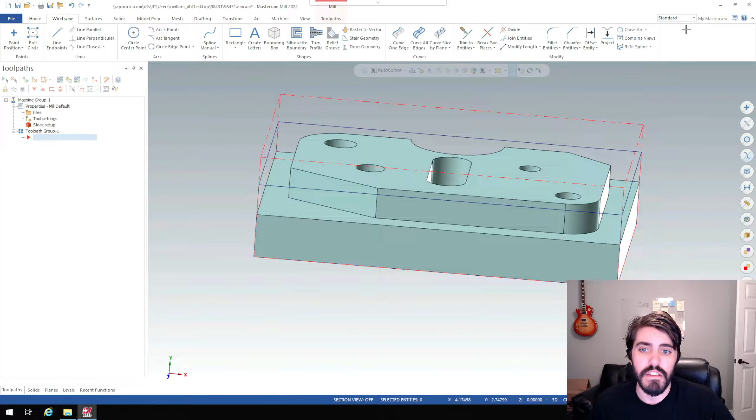In this video, we're going to continue on with MasterCam and I'm going to explore two different 2D milling operations. And these are going to be more simplistic in that we're going to use face milling to cut away the extra stock material. And then we're going to look at some contour milling, which is just going to be the outside island of the 98431 part that we have in front of us.

So I'm going to now move back into my Toolpath tab. And inside Toolpaths, you'll notice that we have a 2D file folder collection as well as a 3D multi-axis. And if you hit the drop-down arrow in all of these, you'll see that there's more icons that are all logged in each one of these. Typically, you're just going to find whatever operation that you're doing, so like a 2D operation.

And when I hit that drop-down menu, I'm going to look for face milling, for instance. So I'm going to click on face, and Toolpath Group 1 is creating a facing operation in that first icon underneath Toolpath Group 1. And whenever you're selecting Toolpath, it's asking you to either use wireframe geometry or 3D geometry, and it's giving us a couple options in how we can select it.

So the first piece of geometry that I want to use for face milling is that wireframe bounding box that we created. So instead of relying on the solid geometry, which is the blue box that's filled in, I'm going to use this wireframe mode over here in the solid chaining. And then it's going to change to wireframe chaining. And I will then select just a solid chain here.

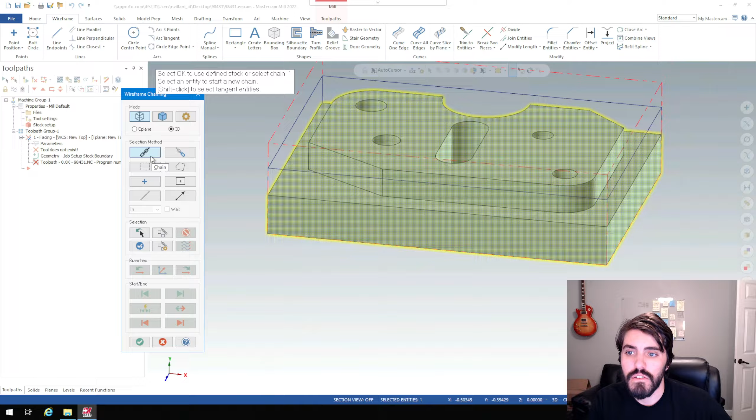And when I click on one of these top blue lines of my wireframe, you'll notice that I have more arrows that I can either choose or select from. If you want to, you can select this red arrow all the way around. I think even easier is just to hit the fast forward button right here, so it's endpoint forward inside of this chaining toolbar here. So I'll click this 3 times, and that's going to go all the way around the top of our face there at the Z0. I'll hit the green check mark, and then it's going to open up this 2D toolpath facing.

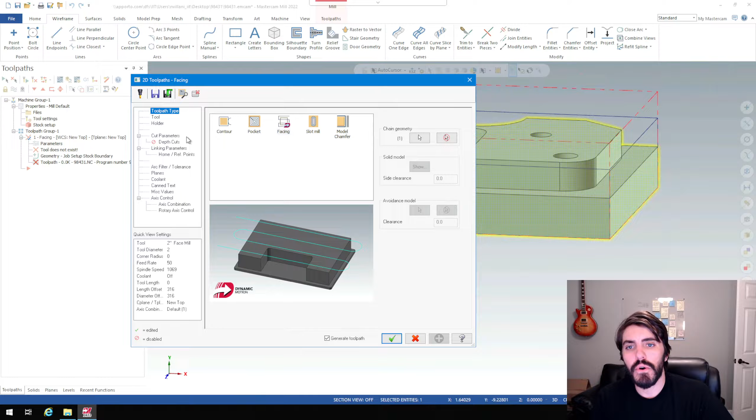So this is the bread and butter of all of the toolpath operations and how you set up your settings inside of MasterCam. So we've already selected what kind of toolpath type we're doing, so it's facing, and the chain geometry is right there. That's what we just clicked. If I have to make any changes, if I forgot to select a piece of geometry, I can always click on this again. I can right click and I can rechain all, and I can click through it once again if I wanted to. So you have total flexibility to go back in and manipulate those selections.

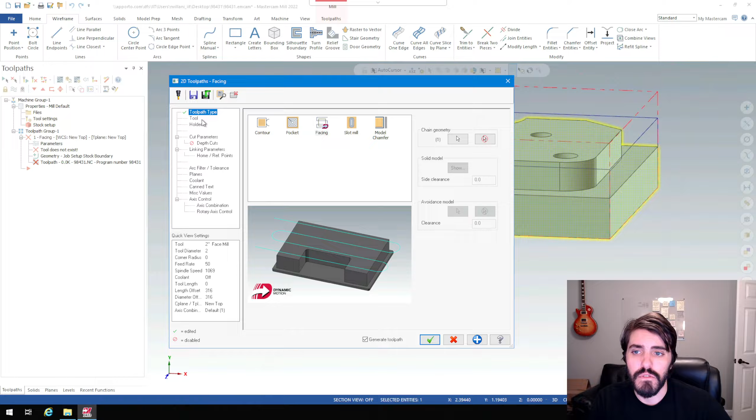We're going to go into Tool now, and inside of Tool, this might be a little bit overwhelming when you're using a stock machine. So if we go in here to Select Tool Library, you'll notice that there are quite a bit of tools that we can choose from. In this specific instance, I have 446 tools that are in this specific library. We're obviously not going to use all of those when we're going through this 98431 part.

And I'm going to try to whittle this down and filter it out by then going into Filter. And you can see here we have an array of different icons that we can select from. I always just hit none so that it doesn't select any. And then if I'm using a face mill, for example, I know what the face mill looks like. And you can also hover your mouse over all these icons and it'll tell you what they are. So this would be an end mill flat, end mill sphere, which is a ball mill, end mill bull mill, and so on and so forth.

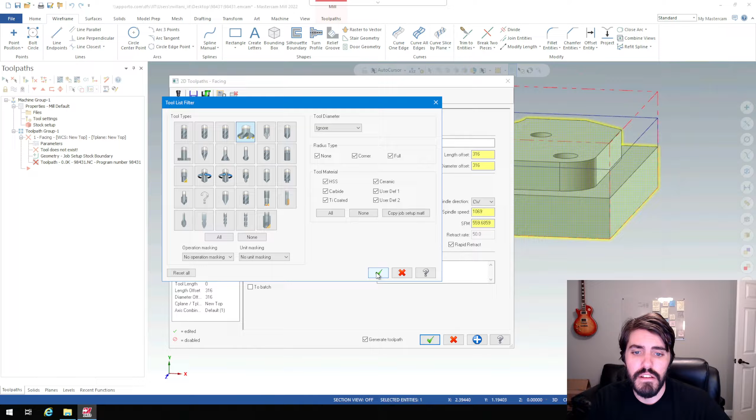So I'm going to click on the face mill, which is the 4th icon, and then I'll hit the green check mark. So now when I go back into Select Tool Library, it actually filters it down to just a handful of tools instead of the whole 446 options that we had before. I know that I have a 3-inch face mill in our machine, so I'll click on 3-inch face mill, hit the green check mark. We have some standard speeds and feeds that are set up with whatever tool that we're pulling from that library.

I'm not going to go into changing these quite yet, so I'm just going to add a comment now and just say 3-inch face mill, which is helpful because when we export this out as G-code and we see the whole post, then I can look for specific instances of where those notes are, and I know where that operation starts and ends. So always put a comment in with whatever tool that you're using.

Holder, we're going to leave that stock. Cut parameters. This is just how the tool is going to cut in what direction. So for example, we can have it just cut one way and come across and then come back and cut again. I'm going to do something that's simple, but it's also bad for the tool in this instance. This is just more or less for educational purposes and how to understand it, but we're just going to do one pass. So we're going to use the entire tool and we're going to try to cut away the entire face.

So I know that the part, its width there is 2.5 inches and I have a 3-inch face mill. Well, I can cut across that entire face using the entire face mill. It's going to be bad because it's going to create heavy chip load on that face. We'd rather have it come in with a radius so that we have thick to thin chips. But in this instance, when we're coming across, it's going to be thick, thick, thick, pretty much until the halfway point. So we're going to do one pass. I'm not going to change any of these other pieces of information.

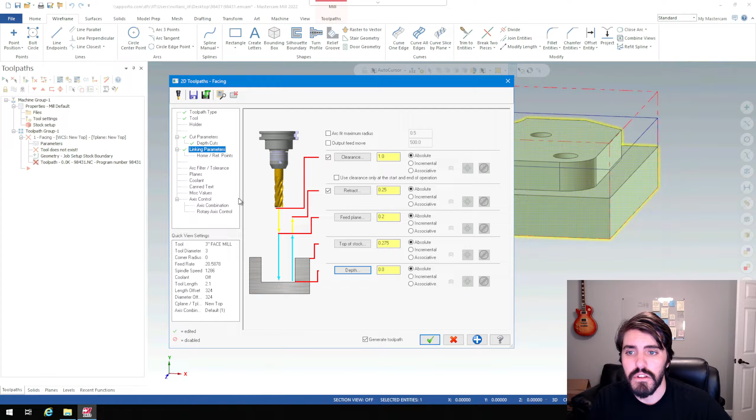We can also override this a little easier by just clicking on these depth or top of stock icons. And I can select, for example, this is my Z0. Any position on the Z0 I can select and it'll pick up 0 for that dimension. You can go down here into planes and make sure that this says new top, new top, new top, linking itself back to that new top plane that we created. And then inside coolant, I can just turn my flood on. Once you've set up these settings, it's usually going to remember them for the next toolpath, so you won't always have to go back into here.

So I'll hit the green check mark on this first face mill. I'll zoom out a little bit, and I'll explain how to see a simulated version of this toolpath. So right now I can see my blue lines are coming across and they're going down in those 60 thousandths increments.

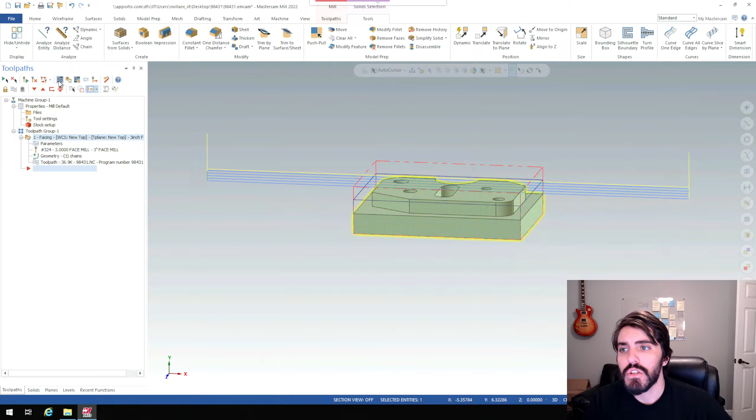And I can see how that tool moves by selecting the waves over here in the toolpath group. So if you look for the waves, you're going to hover over it and it says backplot selected operations. So when I click on backplot, you will then simulate a tool for whatever operation is selected. So you can see over here in my toolpath group, I have a blue check mark that is over the file folder of the facing operation that I just created. So that's telling me that it's going to simulate the backplot of that specific operation.

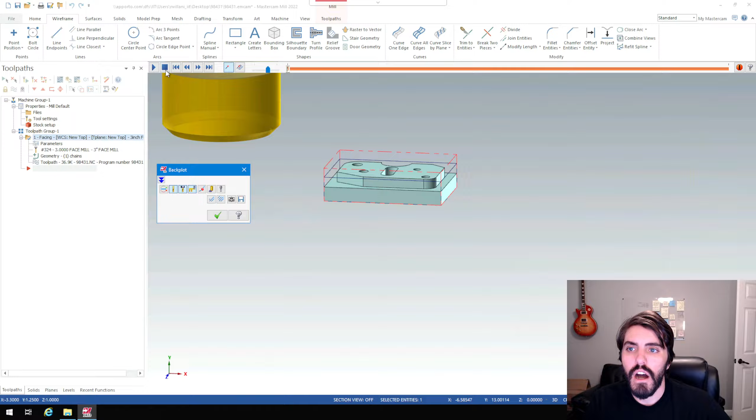And then you just hit the play button and you'll see that it's going to then travel with that blue geometry. And that yellow geometry is actually good to see too, because that's the rapid that's moving back to its original location. So we're seeing something interesting with this toolpath we just created. I'm identifying a couple things right here. First, that there's a lot of wasted time going up to that rapid clearance and then coming back over. And then also that it's going a little bit too far off the part. So we can actually manipulate that toolpath geometry after it's already been created.

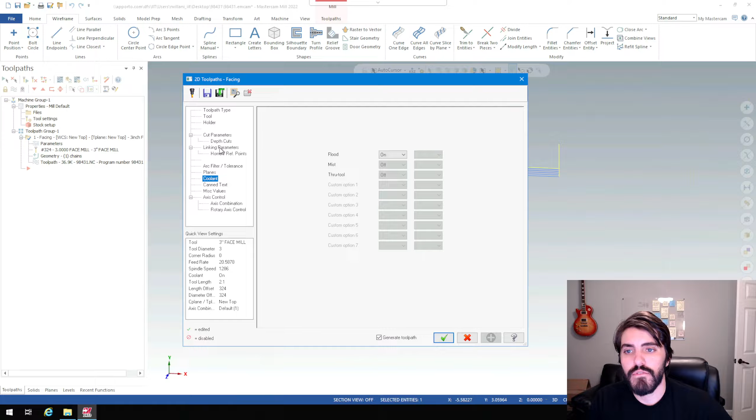So I'll hit the green check mark here in the backplot. And I'll then go over here to my toolpath tab on the left-hand side. And then I'll double click on parameters under facing, that first operation. It's going to bring me back into the parameters window here. And I'm going to click on cut parameters. And I'm going to change this. So this is the overlap.

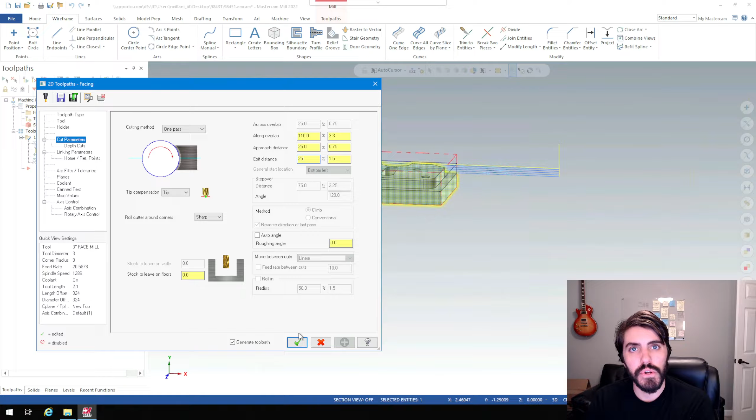So now I'm going to change my exit and approach distance. So instead of it being 50% off the face, I'm going to make it 25% and 25%. And what this is doing is it's going to reduce the distance it's traveling off that face from left and right, the approach and exit distance. So if I hit the green check mark here, you're going to notice that this blue line is going to shrink by half.

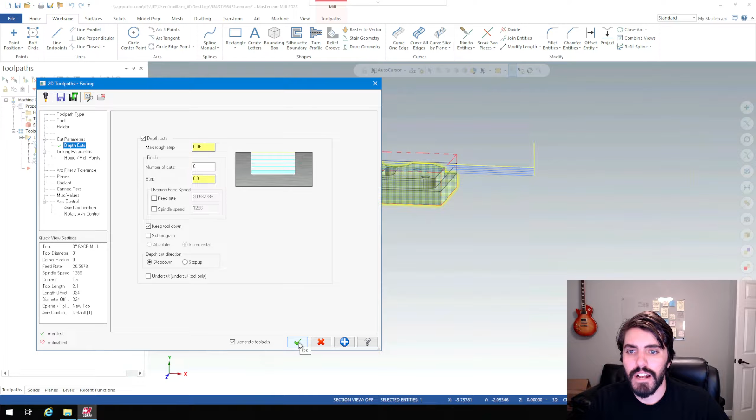And then we'll double click on parameters once again, and then we'll go over here to depth cuts. And inside depth cuts, we're going to choose to keep the tool down. So when we click on keep tool down, which is located right here, it's going to remove that rapid every time that it's going from one side to the other. So I'll hit the green check mark. And now when we go back into our backplot, which is the little blue waves right there, let's take a look at how this looks now.

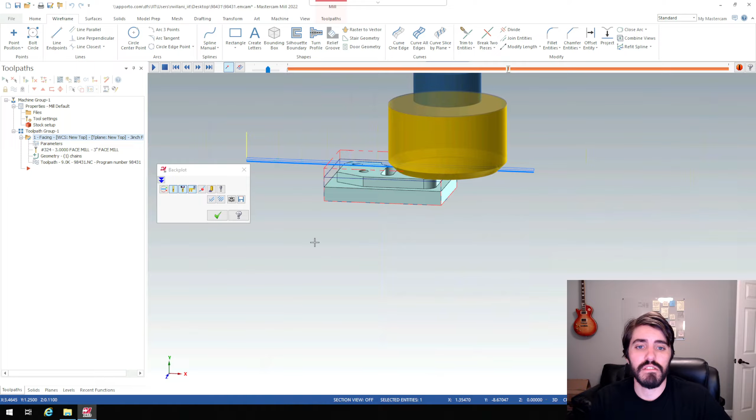So before it was coming across a little bit too far and then coming up. Now it's just going back down and it's doing one pass back and forth. And again, it's kind of bad for the tool, but it's easier for us to understand this type of geometry as we're starting to enter in the face milling. All right, then I'll hit the green check mark, and now I can continue safely on into my contour steps.

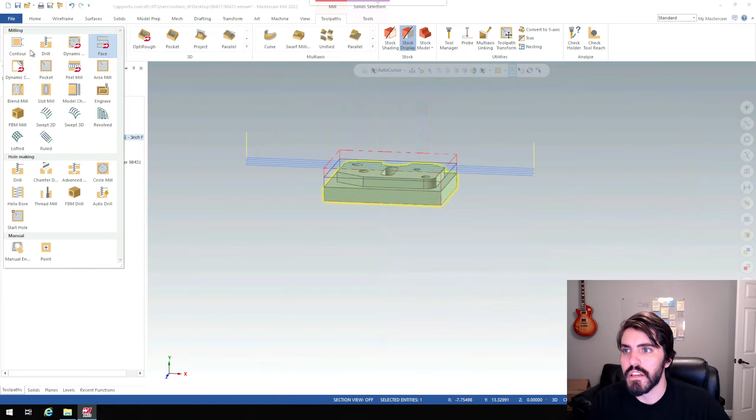So I'm going to go back in here to toolpaths up here in this tab. Looks like I accidentally clicked off of it. And then I can click contour right here. I can hit the drop down again and choose contour once again. And you'll notice that we have a contour that was selected in our toolpath group. Now this is our second operation.

And one thing I want to point out here, when we're talking out on the shop floor, usually when we talk about operations, we talk about operations as how many times it has to move inside of the work holding and how many programs are associated to that. Inside of Mastercam, it's a little bit different in the sense that every toolpath that we're creating is also called an operation. So you might see toolpath group 1, which is operation 1, and then toolpath group 2, which is operation 2, and then inside each one of those operations are 5 or 6 or 7 different operations. So just keep that in mind as we go through some of these different kinds of toolpaths.

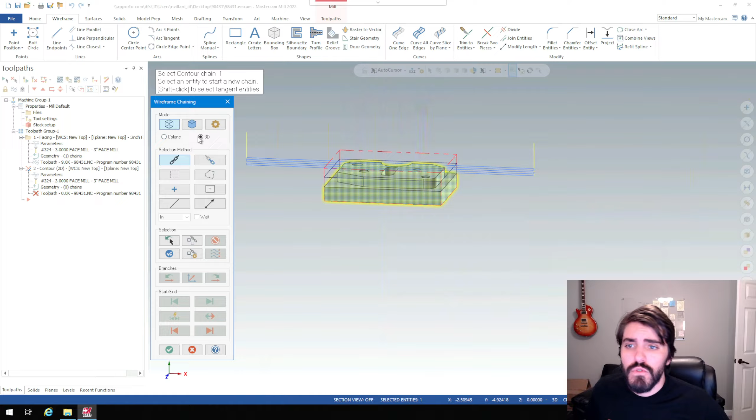So now I will be choosing geometry for our contour milling. And inside contour milling, I don't have any wireframe to reference anymore. So I'm going to go over here to the solids icon, and I'm going to move this window out. This window just tells you easy ways to select geometry here. Usually it's giving you a direction of what you have to do next to move on to that next step.

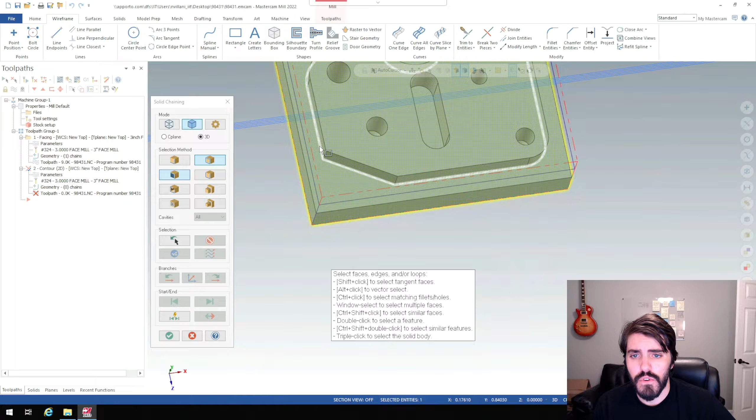But inside of the solids here, I'm going to make sure that I have a solid loop here as well as faces selected. I can also deselect face, but these are the two that I usually keep on the most. So now when I have loop selected, you can hover over your geometry that is connected via tangency. So for example, I want to select the contour right here, and I'm going to go around the entire part.

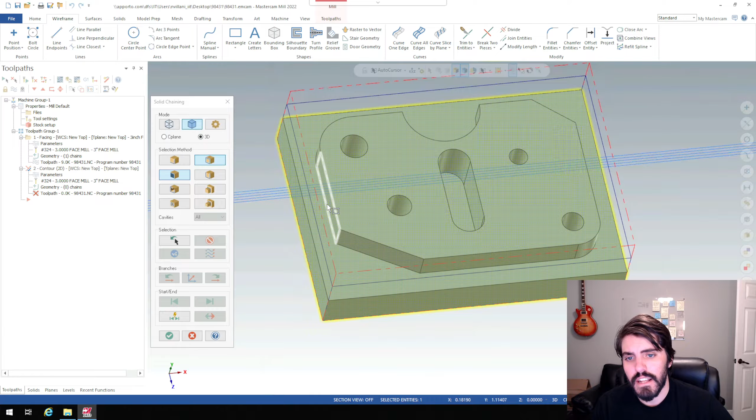Move this down here a little bit, move this window out, and I want to select the geometry that looks like this. And it's hard to kind of get this the first couple times. You might accidentally click this square here, this rectangle here, but you want to get to a point where you can select this point of tangency so it's getting the entire island.

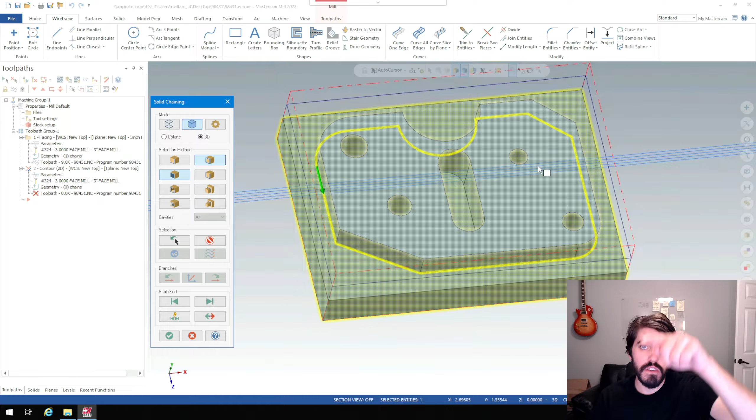And it's important as well where you are selecting on that line of tangency, because for example, if I select up here, my arrow is going to go down, and that's going to create a conventional milling operation, which is not necessarily what we want to do for this island here. I want it to be climb milling. So I don't want it to be going counterclockwise. I want it to be going clockwise.

So I'm going to unselect here, and then I'll select it again from this quadrant. And you'll notice that that arrow is now pointing clockwise, which is what I want. It's my climb milling operation. I'm going to hit the green check mark on OK. And then I'm going to go back into tool because I don't need to change my toolpath type.

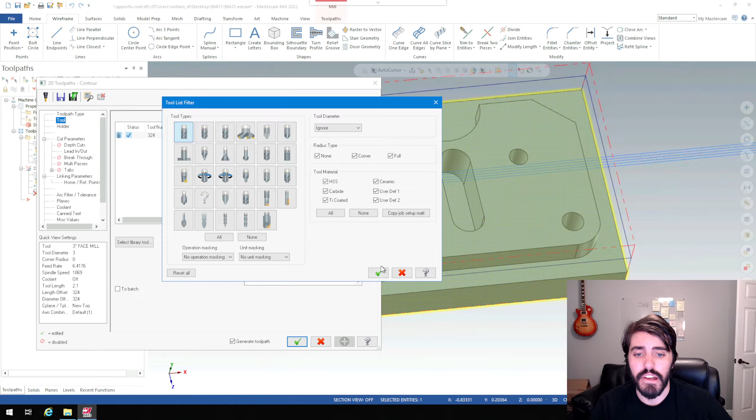And once again, I'll have to look for a specific tool. So I'm going to use a 5/8 end mill in this instance. And once again, I'll go into filter and then I'll select none. And I'm looking for a flat end mill, which is our first selection. And then select tool library. And I'm going to look for a 5/8 flat end mill. So right there, tool 292. Hit the green check mark. And I'm just going to title this 5/8 rough contour.

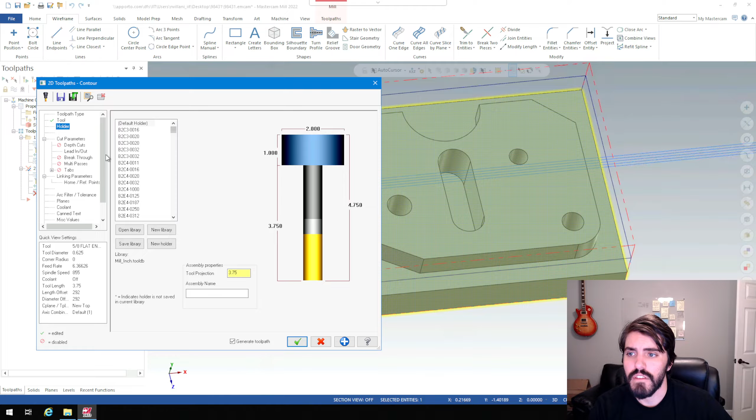And then I'll go down in here to holder. We're going to leave that default. Cut parameters. We're going to leave the compensation type as the computer because that's how we selected it. We're already going clockwise in this instance. And cutter compensation, we're going to leave left. Tip compensation, that's fine.

And then we're just going to leave some stock on the wall. So in this instance, I'm going to leave about 5 thousandths on stock wall and then 5 thousandths on stock floor. We'll go to depth cuts. We're going to go the full length of the tool here. That's totally fine. And then we're going to go lead in, lead out. This is important. This is like what I was talking about with the thick to thin chips.

We don't want to just crash our tool into the side of the part and then move up in terms of the geometry. So think of this kind of like a Formula One race car. If you're going like 200 miles an hour and you want to take a turn, well, you have to slow up and then ease into that turn as you're curving into it. You don't want to just go straight in and plunge to the left.

So these tangency loops are going to help us with our lead in, lead out. It's just creating a nice arc to kind of ease the tool into the side of the part as it's cutting. So I'm going to leave this all stock here. If I wanted to change it, if my work holding was a little thinner, I could adjust that. Go over here to linking parameters.

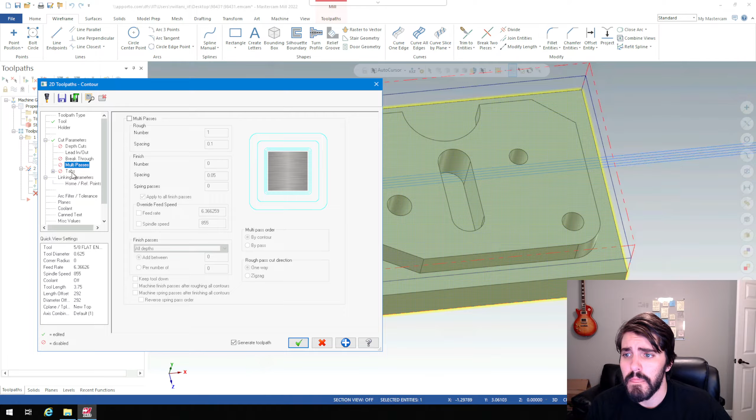We can turn on our clearance. We can change that to 1. Retract, we'll do absolute, absolute, absolute, absolute. So again, this is a pretty interesting instance where I have my top of stock. It's recognizing that the top of stock is still set from the stock setup that we had. Well, that's cut away now with that facing operation. So we're going to choose the top of stock to be 0.

We can type it in, obviously, but we can also click on top of stock, and I can select anywhere on that wireframe there. So that top of stock will be 0. And then I'll hit the green check mark. So you can see I have toolpath that is now going around the contour of that island. This is just a roughing operation where I'm just kind of cleaning up the outside there.

And I want to use this as an example because the way that I've explained G-code in other lectures is that we want to create an offset or a cleanup before we get to this finished face. And you'll notice something that's interesting between two different ways we can view this toolpath. So for example, the first way that we can view it is that back plot, which as I

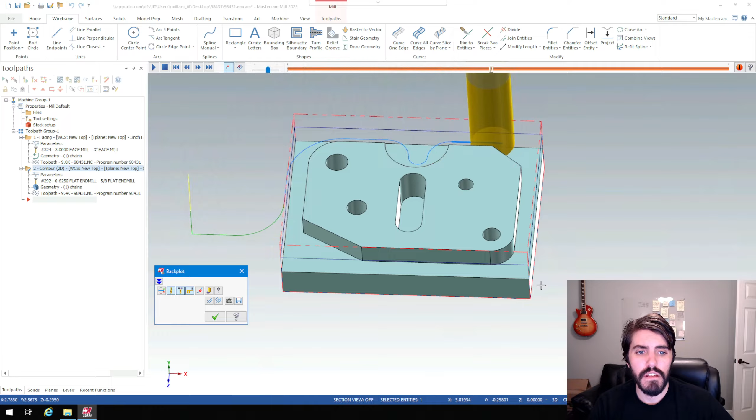showed you right here. And if I see this tool and I hit the play button, nothing looks terribly out of the ordinary here. It's going to just travel around the face of the island or the tangency loop of the island, and it's going to exit out on the left here. And this all looks good, but right here is where we're going to see a problem with the next simulation that we're going to do with our toolpath, and I want you to keep that in mind.

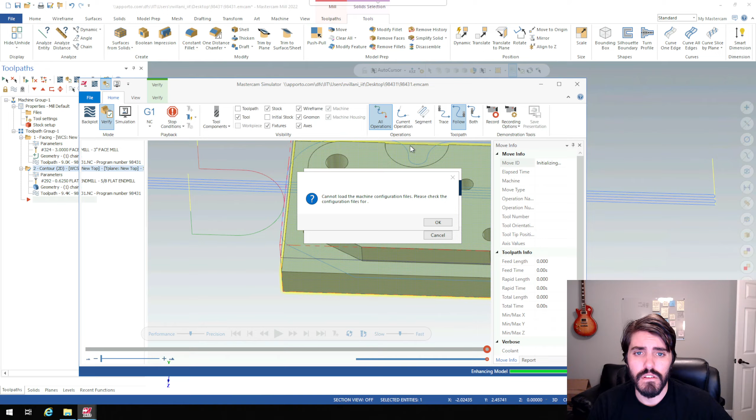So instead of using the backplot now, I'm going to now select verify, which is the little half pipe that's next to the backplot option. So I'll click on verify. Sometimes you have to click through this a couple times. It's going to default to a machine. Sometimes it's not finding the post for it. So click X. You can also hit OK, OK, X on that, and then go ahead and click it once again.

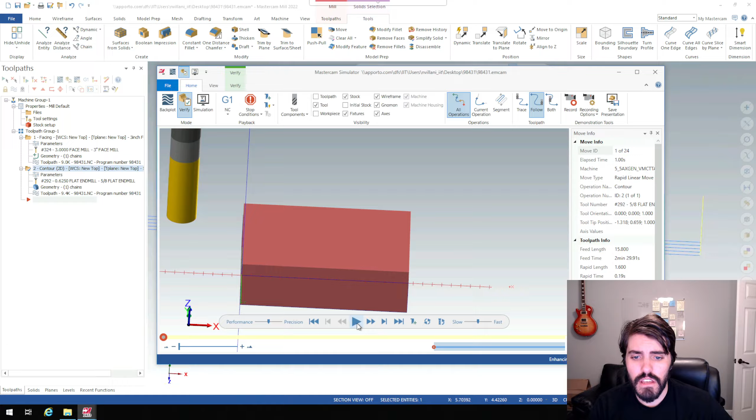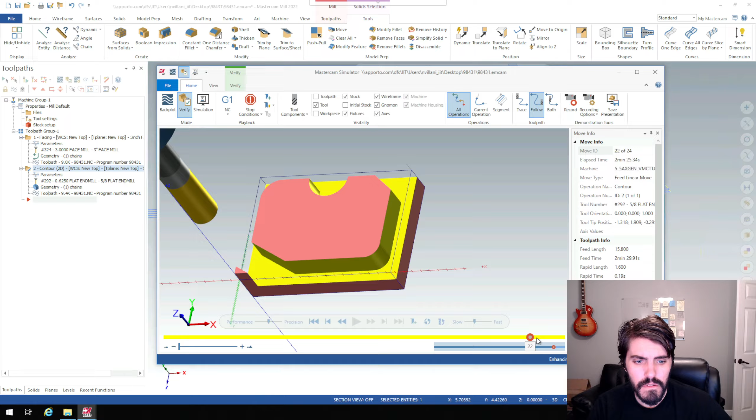Okay, so now I can see my stock material with the tool there. And if I click the play button, look at that. So if I rewind that, let me slow it down first and then rewind it. Again, everything looks good, but right here, I'm going to move our play button back here a little bit. Right here, this is going to be a problem.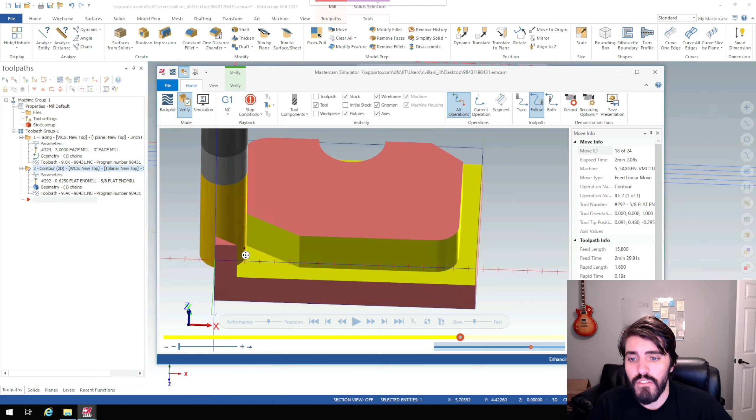So we've given an opportunity for the tool to cut 100% of its diameter, and it's going to probably overload that tool with chips. And there's a good instance where this tool might even break, it might dull it or mar it, or create a lot of chatter. So we don't want to be in this instance where we're cutting down this deep with the length of the tool, and then also have 100% engagement from this side to this side. So we have this little pylon that's left over if we don't have a cleanup portion of material there.

So I'm going to hit X here, and I'm going to then add another piece of geometry into this to make that cleanup a little bit easier. So we're going to be exploring how to add toolpath and move toolpath around, and the way that we do that is using this little red arrow here in the feature tree. So I'm going to move this up one instance so it's above this contour.

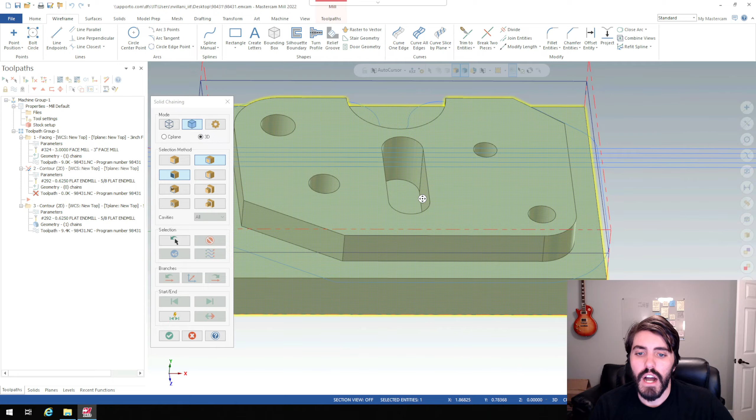So I'm going to click on the red arrow up, and at this point here, now I'm going to add another piece of geometry. So I'm just going to add a nice square rectangle cleanup around that edge so we can get rid of that pylon that's left over. So I'll go over here back into toolpaths, I'll select contour once again, and I'm actually going to fake Mastercam out a little bit with this one. I'm going to do a rectangle cleanup on the entire outside.

So I'm going to select that whole rectangle right there, and then I'm going to hit the green check mark. And from here, I'm going to then select the same 5/8 flat end mill, and I'll do a 5/8. It's a rough

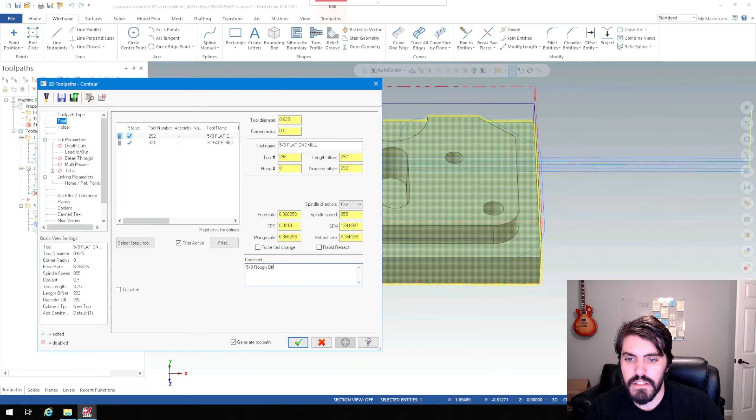offset, and then I'll go into cut parameters, and instead of leaving a stock to wall at 5/1000ths, I'm actually going to fake this out in the sense that if I was going to travel around this rectangle and leave 5/1000ths of stock cleanup, well, it would never touch the part. But I want to be inside the part. So what I'm going to do, instead of creating all these different wireframes and then offsets and all that stuff,

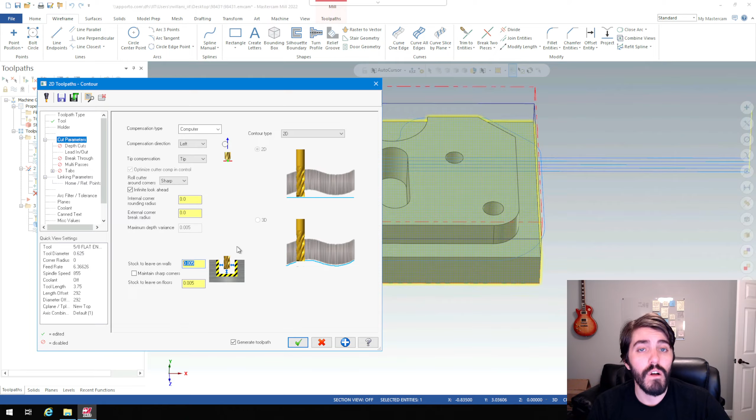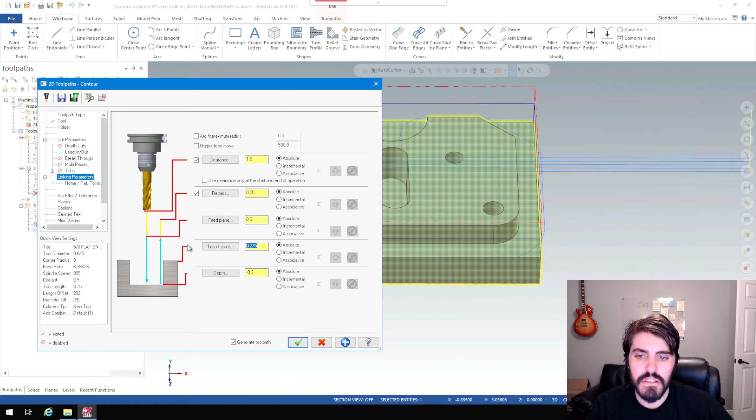well, I'm going to select the stock to leave on wall, and I'm going to type in negative 0.120. And what I'm doing is I'm actually stepping it from that outside edge, and I'm saying go offset negative, so it's then going to be inside the part. And then I'll leave stock to leave on floors 5/1000ths as well. All this should be the same. Linking parameters, we'll just change that top of stock to 0, and then hit the green check mark. So now, if I want to see all of these operations simulated, I'll select toolpath group 1 inside of my feature tree here.

So I have the facing, contour, and then contour 2D selected. And then now I'll go into verify. And if I want to see the difference between these tools, I'm going to go over here to the verify tab, and I'm going to change this to color loop. So I'm going to turn my color loop on. So now every time a tool makes a cut, that color loop will be represented by a different color.

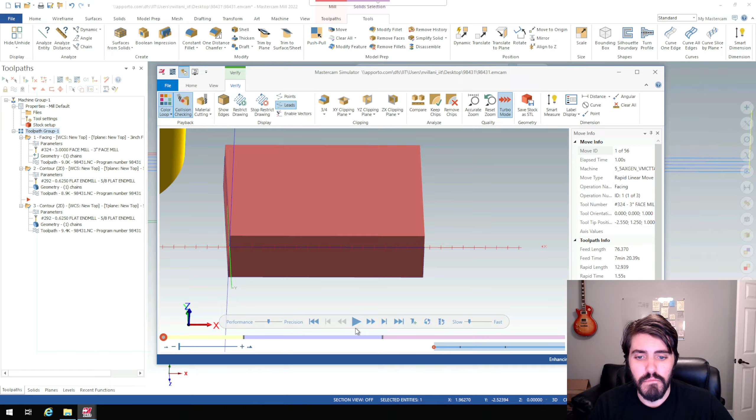So I'm going to slow this down again, and then hit play. So we'll see that facing, and then this will be that offset contour, and then there is going to be the island profile. So take a look at that. We got rid of that extra little pylon that was there that would have created 100% engagement of the tool, which could end up hurting the tool in the sense that it could break or that it would dull a lot quicker. So all we have to do now, if we want to finish this up, because these were roughing operations, we're leaving stock on the walls.

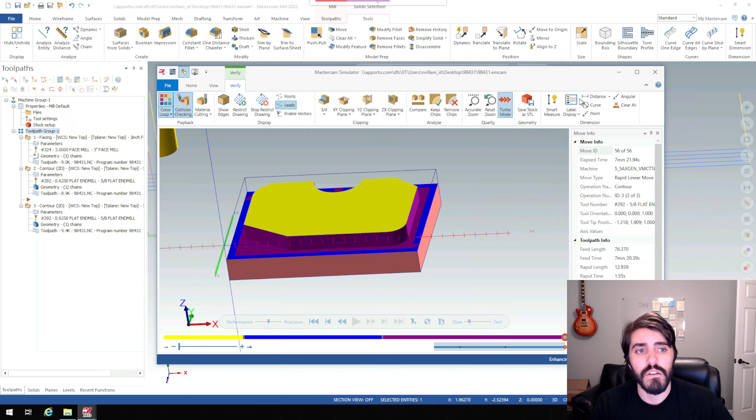If I want to then create finish passes of these, all I have to do is move my operation arrow down. So that's going to be the red arrow. I'll move it one step down, so it's then below all these pieces of geometry. I will select and hold down the shift key on the second and the third operation. So this is going to be the contour offset, and this will be the contour island.

So I'll select both of those while holding down the control key or the shift key, and then I'll right click on them, and choose copy. So I'm going to copy these two operations, and then underneath it, I'm going to right click where that red arrow is, and then select paste. So then it just pasted those exact operations, but now all we have to do is change them from stock to leave on wall, 5/1000ths or whatever it was. I'm going to make it 0.

So go in here to parameters, and I'll go into cut parameters, and instead of stock to leave on wall, this one I'm going to make it -125 because that's going to be the step over to the exact offset there, and then I'll make this 0, and then I'll change my tool note to be, instead of rough offset, finish offset.

And if we wanted to, we're not going to see this in this specific tool library because it's default, but I would have a finish tool and a roughing tool. So that way I'm taking way less cuts on those finish tools, but I'll run them way faster and give a nicer finish. So in this instance, you're not going to see the benefit of it as much, but in a more real world example, you'll see that benefit in that you can do a lot of cutting with that roughing operation, and then you can do more fine cutting at a faster pace with a finish tool.

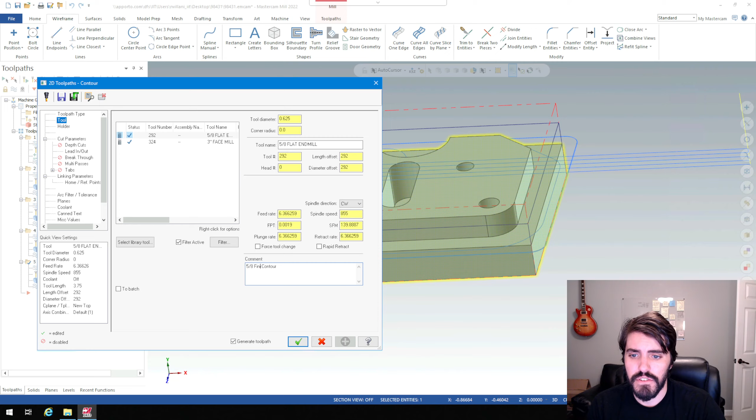So then I would select a finish tool in this instance, but I'm going to use that 5/8 flat end mill once again, and then I'll hit the green check mark, and I'll go back into the fifth operation here, which is going to be that island, and then instead of it being the rough contour, I'm going to title that finish contour, and then I'll go over here to my cut parameters. For stock to leave on wall, I'll make that 0, and stock to leave on floor, I'll make that 0, and then hit the green check mark.

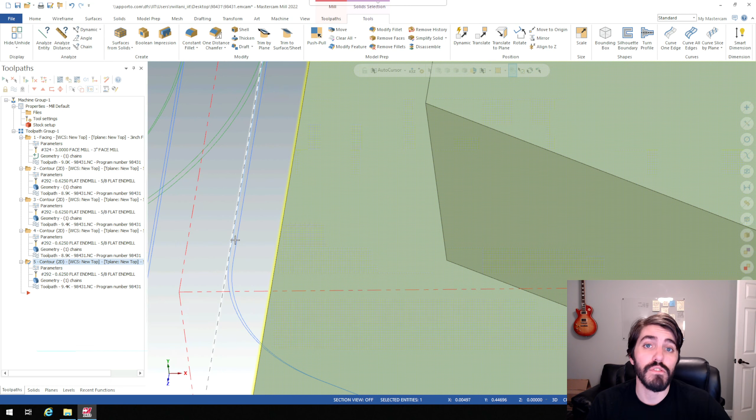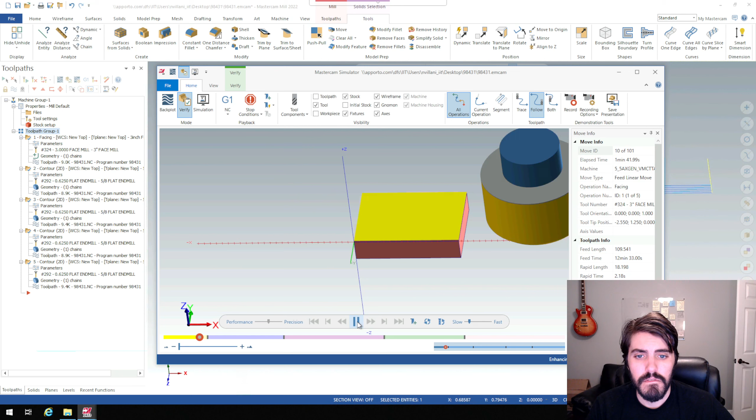So then when I zoom in to these toolpaths, you can see that offset that I'm creating. That's that 5 thousandths for approaching with the roughing tool, and then the 5 thousandths is just going to be the finishing tool in this instance. So now I'll go over here to my toolpath group 1. I'll select everything, and then I'll select my verify selected operations, and then I'll zoom this out a little bit, and hit the play button once again. And that's going to be my roughing offset, roughing contour, finish offset, and then finish contour.

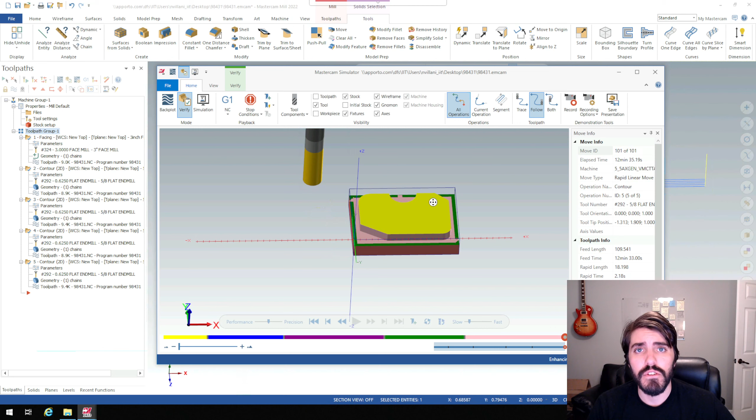And we're going to end the video there. I'll move into slots and pockets after this. But as far as islands and facing and 2D contours, this is a really good start for you all to play around with. Close out of that, and we can also save this as well.